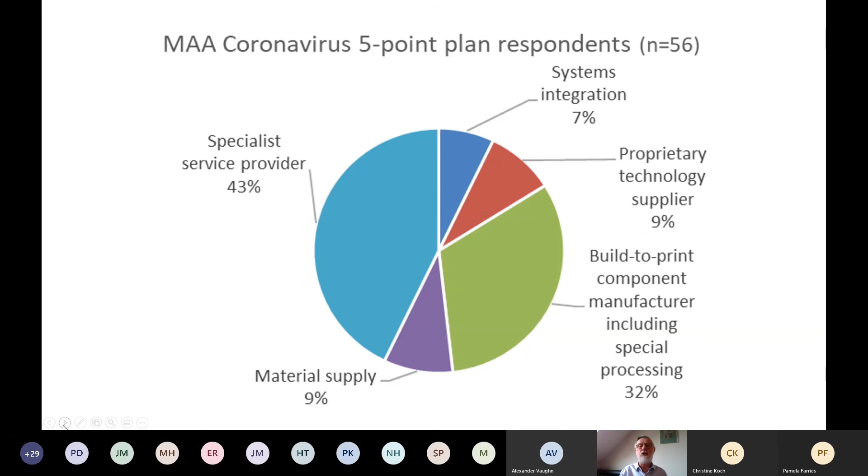We asked companies what they prioritized this year and next year. This year, innovation was a very low priority, probably because people are interpreting it in terms of formal R&D programs, or it could be they're not realizing that a lot of the changes they're making to cope with the current crisis could be seen as innovative, and therefore, from the viewpoint of the Aerospace UP program, potentially projects that could be funded.

Innovation becomes slightly more important in people's thinking next year.

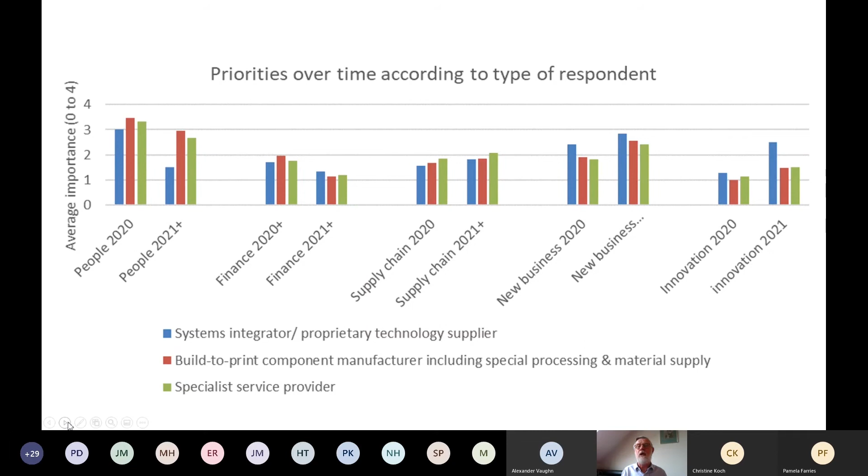When we compare the different groups, what's interesting is that none of the groups think innovation is particularly important to the current period. Perhaps they're pushing research programs to the right if they're undertaking them, and they don't see that as a priority. But next year, not surprisingly, the systems integrators and the proprietary technology suppliers boost innovation in terms of their priorities, and that's what brings it up in the average priorities of the group as a whole.

And that's comparing the two years again, this year and next year, and you can see that change in innovation becoming more important again next year.

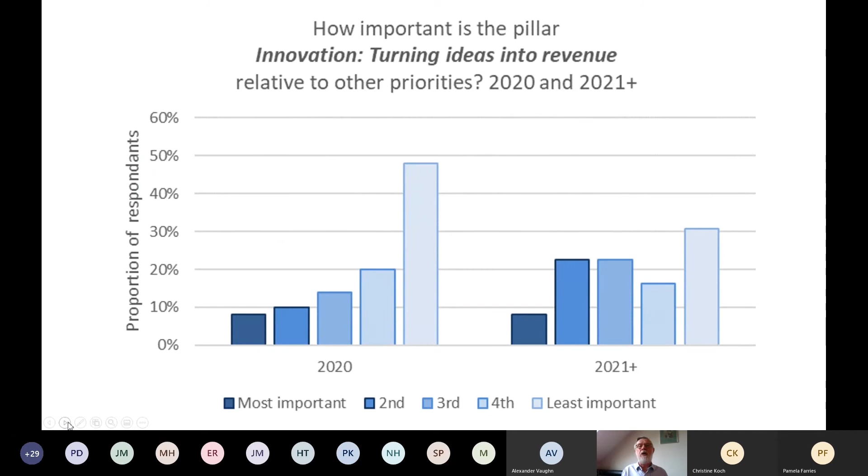If we drill down into a bit of detail, we gave companies these options to choose from, and then an open-ended question to allow companies to mention other things that mattered. So diversification is critical, the first one on this list. We looked at the rail industry yesterday, for example, and we know that a number of the kinds of projects we run, whether they're NATEP or DRAMA or aerospace sub-projects, are about diversification in the sense that they're allowing companies to enter the aerospace industry with new technology, or encouraging aerospace companies to take advantage of their capabilities in other markets as well.

Opening up innovation in general in the supply chain is seen as important, particularly the bottom-up kind of innovation that we promote in the MAA to support small companies to innovate. And of course, carrying on investing in green technology that the aviation industry has been doing for a number of years now is still important. As you can see here, all three of these priorities were marked roughly equally. There isn't a clear winner in this list.

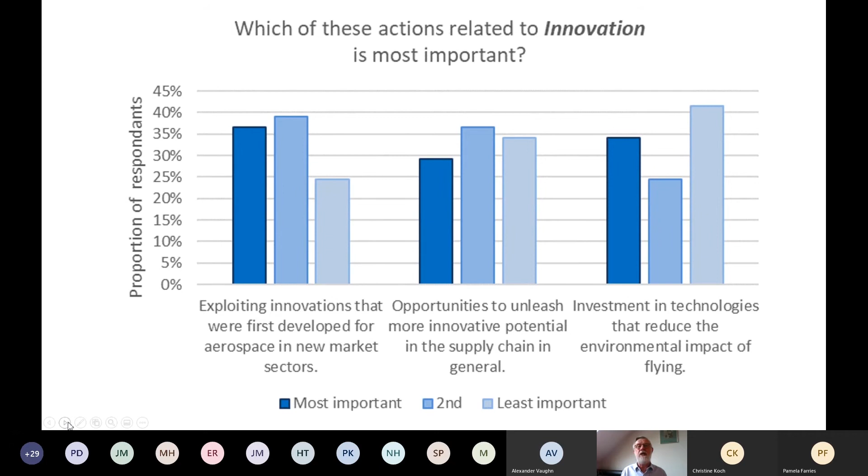So when we asked our systems integrators and build-to-print companies if they had other ideas, nothing really stands out. This is verbatim what companies answered, so nothing that we particularly missed with those three priorities came out in this question.

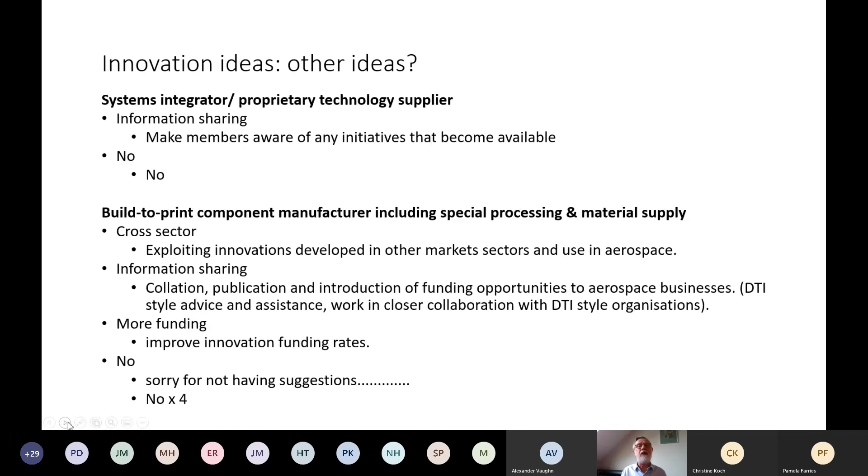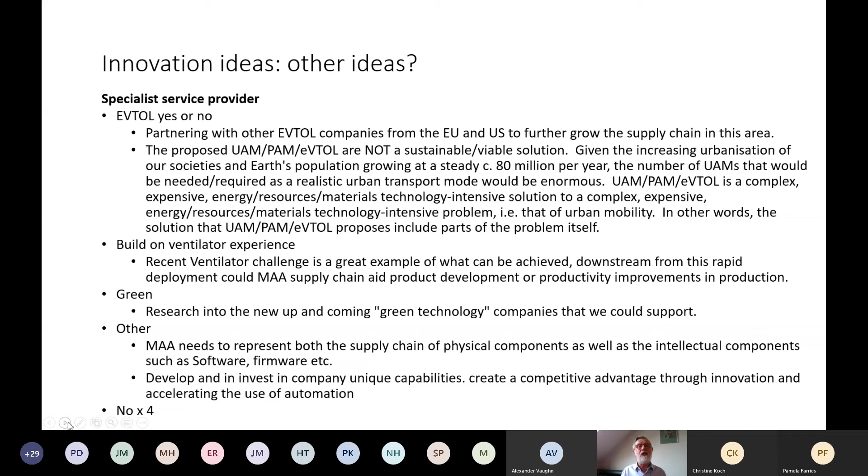When it came to specialist service providers, we did open up some veins of interest with people giving us long answers, particularly proponents and opponents of unmanned aerial vehicles had a debate, unbeknownst to themselves, in these slides, but always useful to see what people think.

So that's the quick summary of the MAA survey, giving you some ideas about what people thought about innovation.

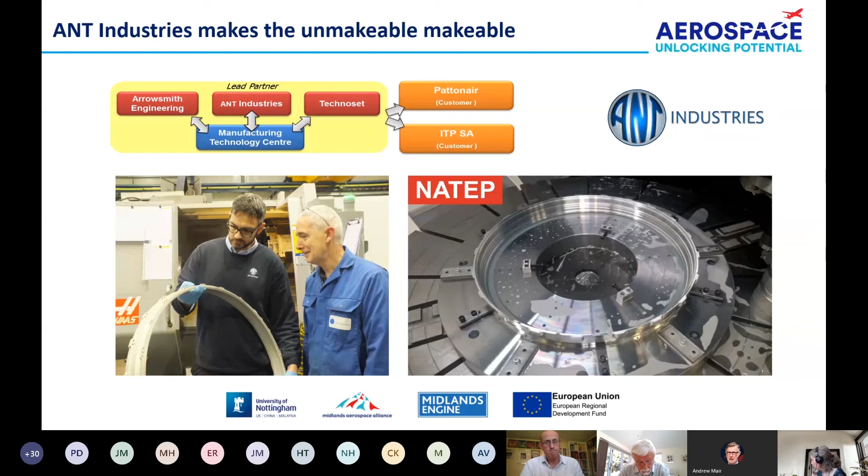And they managed to come up with much better solutions to these processes. The real point here is that this was a legacy part, and the real goal was to be a supplier on the new turboprop engine which GE were designing. Naismith were very keen to show the customer that they were more than a make-to-print company, that they could add value for the customer. Bear in mind, these processes were not originated by Naismith - they inherited them with the design of the part. So when you're thinking about Aerospace UP, think about whether you've got manufacturing process issues or persistent quality issues where the solutions seem evasive, because that could be very rich territory for Aerospace UP.

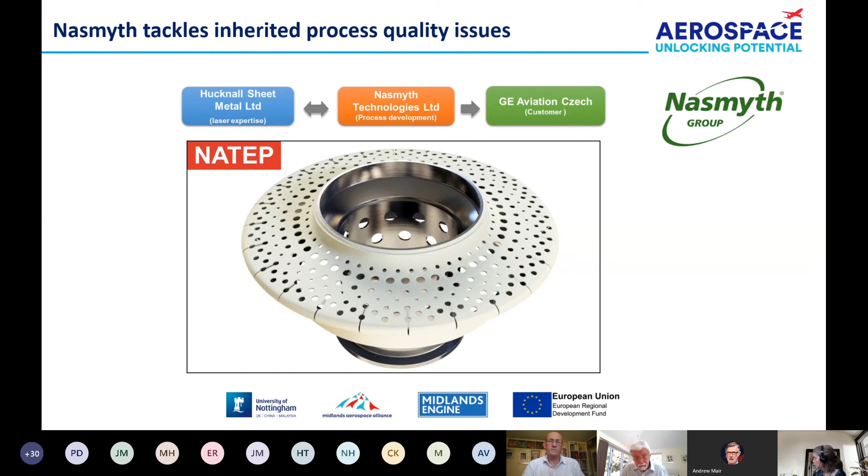So increasing the margin by lowering the cost seems fairly obvious, but particularly if you're in manufacturing where the manufacturing process is fixed, for many SMEs, without some financial assistance, this is often consigned to the too difficult or too expensive category. So Stan has an example of a company that tackled this.

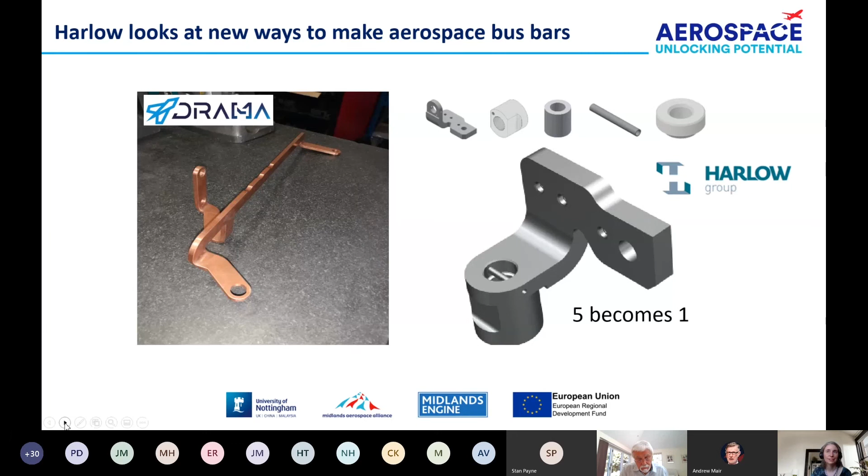Next slide, Pamela. Adding processes where there aren't any, or automating what is currently done inefficiently, can obviously bring benefits, and I want to give you a quick example of a company that did just this.

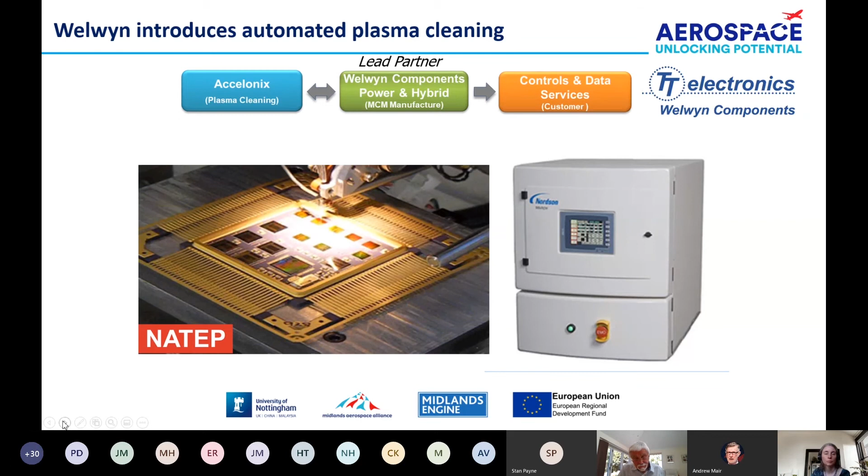So, new markets. Obviously everyone's thinking about new markets at the moment, but if you can improve what you currently manufacture and make it suitable for other markets, then obviously that's a relatively quick win. So Stan's got a good example of that.

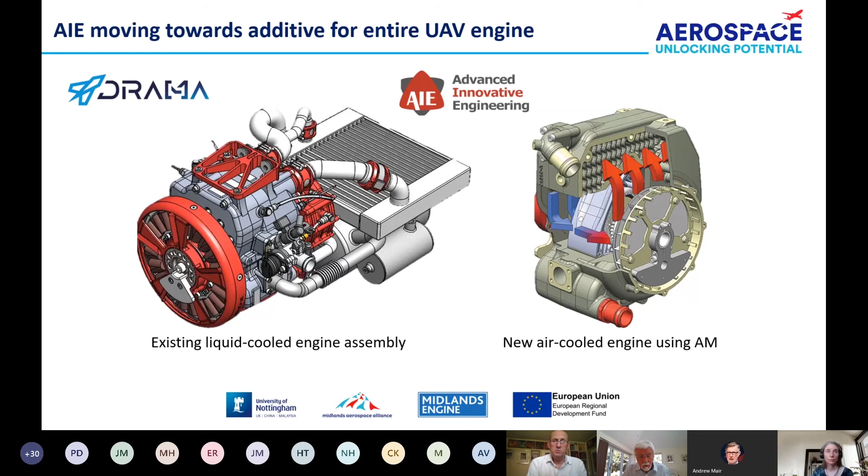It's always a good idea to look at what skills you have and see whether, if you could fine-tune these skills, you could enter other markets. One thing I'd urge everybody to do, if you haven't already, is to skills map your company and all your employees. It's amazing what some employees carry with them as baggage from previous companies, and it's a really good idea to know exactly what you're capable of and maybe didn't know.

When I was at ITP, we skill mapped the whole company, every single job, every single person. It was quite incredible the range of skills that we had that we didn't know we had. Next slide, please.

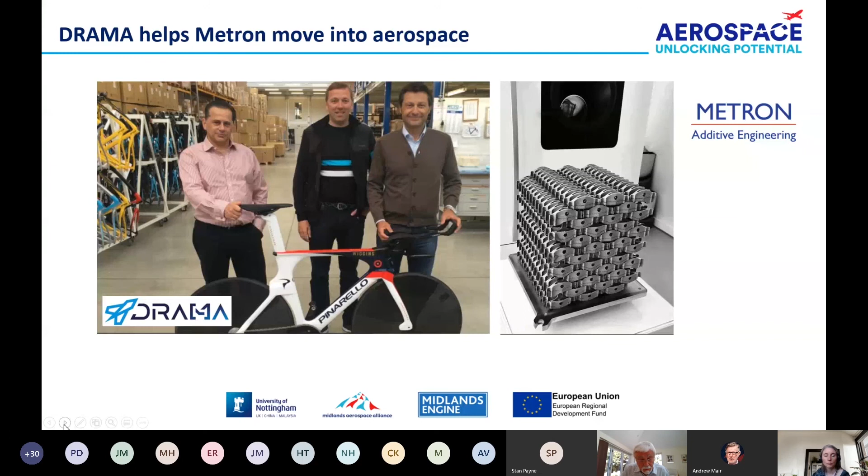Next slide, Pamela. So if you need to develop new skills, then of course that's a different situation, and Pamela's got a case study which she'll talk about that.

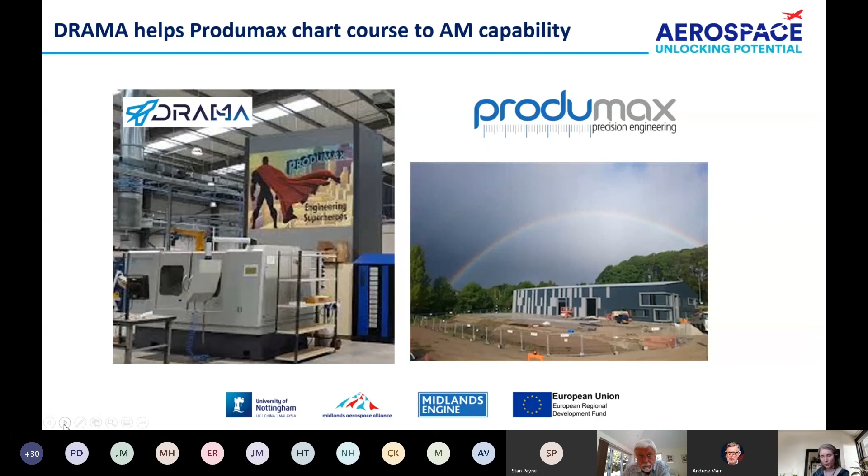So, new markets by developing new products and skills. This is the big one where you really want to go for it. Not perhaps everybody's cup of tea, but for some it has been a very lucrative thing to do.

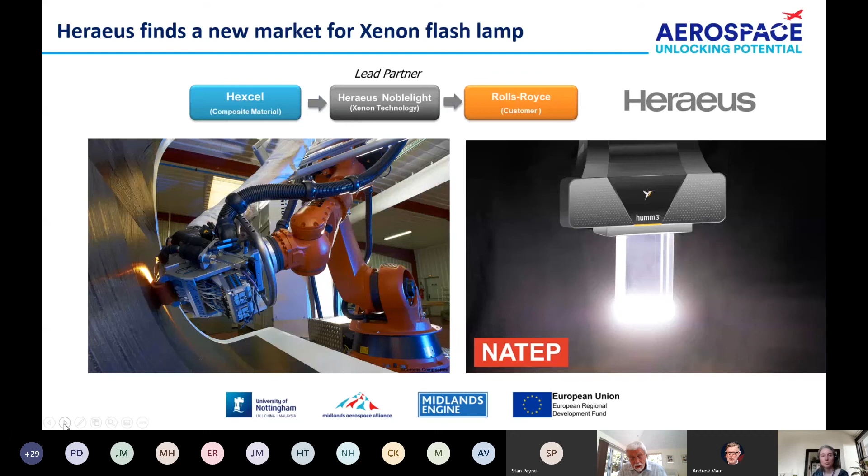Which is very important if you're laying up big composite panels. So just a great example of really examining what you do and drawing out the key things that might be marketable elsewhere. As I say, not for everybody, but for Heraeus, it was a lifesaver.

Of course, not all companies manufacture products. So what about companies that manufacture materials? Could a grant help with a new material or manufacturing process and progress it through to new markets?

This is a good example of that, a NATEP project where SHD, based in Sleaford, Lincolnshire, that makes composite pre-preg material, identified a new type of resin which could replace the traditional phenolic resins used in composites. And this resin was in fact derived from the waste products of sugar beet production.

Seems unlikely, but true. So on this project, they optimized the material, they built and tested panels made of the new pre-preg, and found that it in fact had a better surface finish, better fire resistant properties, was more environmentally friendly and better to produce for operators in terms of VOCs, and had at least equal mechanical performance.

So this was a great example of what we call in the MAA bottom-up innovation. It's an idea which would probably never have come from top down, because it needs the experts that are in these businesses to understand what's possible and then to show customers the potential.

And of course, the great thing about materials is that they're inherently cross-sector. In fact, the sector to take up this first has been the rail industry, despite being intended for aircraft interiors originally. So while aerospace gets itself sorted out, they're capitalising on another market entirely.

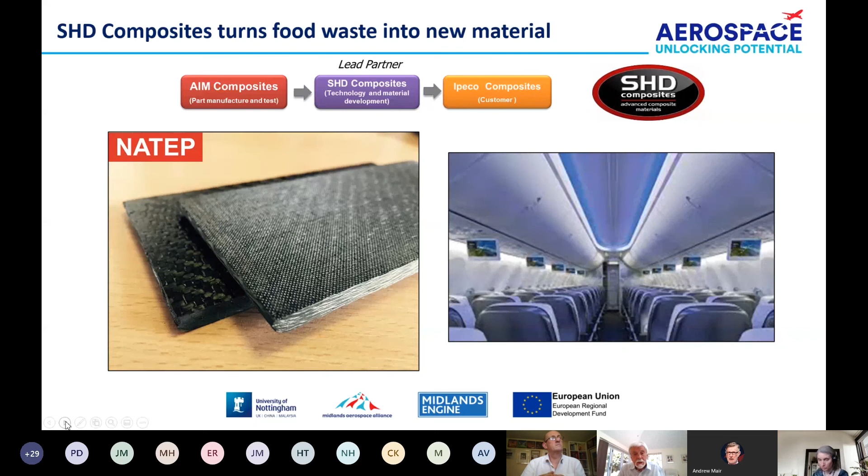So to finish this section, Stan's going to talk about a company that decided to move up the supply chain and just get a bigger slice of the available pie.

Yes, hello again, everybody. A&M EDM are a family-owned business, basically located near the centre of Birmingham, and they've been making rotary engine parts and finishing those parts for many, many years.

They realised that they built up an enormous expertise in building these components, and they decided that they would like to move up the supply chain by designing a whole engine, a whole rotary engine for UAVs themselves, and therefore move up the food chain. So when this idea really held with them, they were helped with a NATEP project to explore this idea, and so they hired a design engineer experienced in small rotary engine design, and decided to make and develop their own UAV rotary engine.

So along the way, they sought and gained the support of a UAV manufacturer and lots of other partners who understood combustion and how to run test facilities, for instance. And this detailed market knowledge led them to develop a very innovative, small but very innovative 11 kilowatt Wankel type rotary engine for UAVs. It was designed from scratch, built and tested in their very own purpose-built dynamometer and test facility inside their own premises.

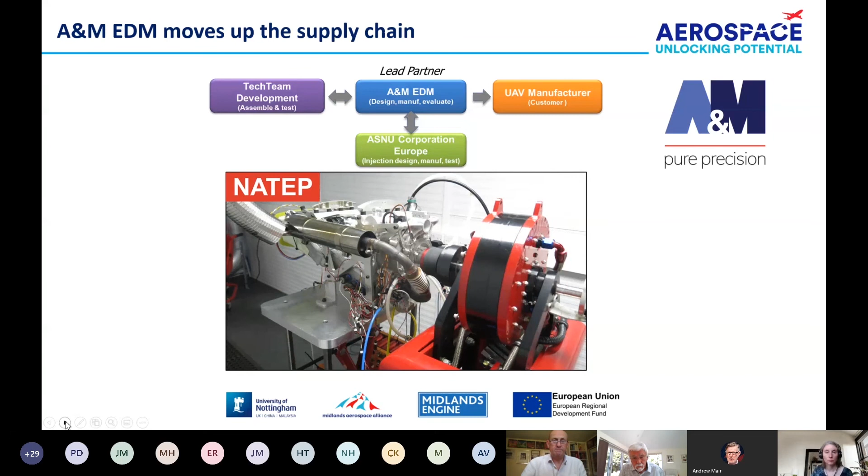Thanks, Stan. So in this last section, Pamela's going to say some words about dealing with the challenges of COVID-19. We don't have many examples of this, unfortunately. I wish we did, but we don't have a lot to draw on. But over to you, Pamela.

Yeah, so the Aerospace Unlocking Potential programme was designed and bid for well before we had any hint that COVID-19 was going to be affecting our lives, but it could still be there to help with issues that are specific to dealing with the virus. And although lockdown's easing at the moment, we're through the spring peak of COVID infections, we are likely to be living with the virus in our society at some level for quite a while.

So thinking this through, companies might even have identified some aspects of the way that they're working at the moment that have advantages. They may find that having their workforces working remotely has reduced pressure on office space. This might lead to the identification of requirements for digital systems to make that form of working become a more smooth running, normal way of working rather than the crisis management way it's been done at the moment.

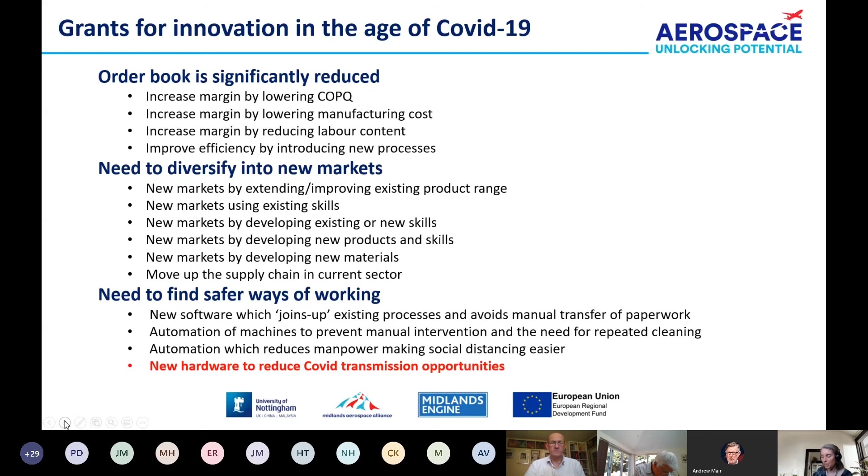a company called Acres Engineering, who are familiar to us as a manufacturer of a range of bespoke products and aids for clients in all sorts of industries, including aerospace. But that included things like stands for safe transport of valuable aero engine components, for example. And they've moved quickly to produce a range of products to allow safe working while COVID-19 is a challenge. So all sorts of screens, innovative door handles, and the sort of very practical, immediate measures that have helped people to work safely in their existing premises, with a short notice adaptation.

But all those things that I've talked about, more digital ways of working, automation and the like, might be something that your company is looking at.

Back to Andrew or Peter.

I think just to finish, we don't like to blow our own trumpets, but we are really very good. I've got about 6 years experience of spotting innovation, and Stan's got even longer. Pamela's got a long experience as well, spotting things that we think of as innovative that a lot of people think of as their day job. So do talk to us. Thank you very much, team.

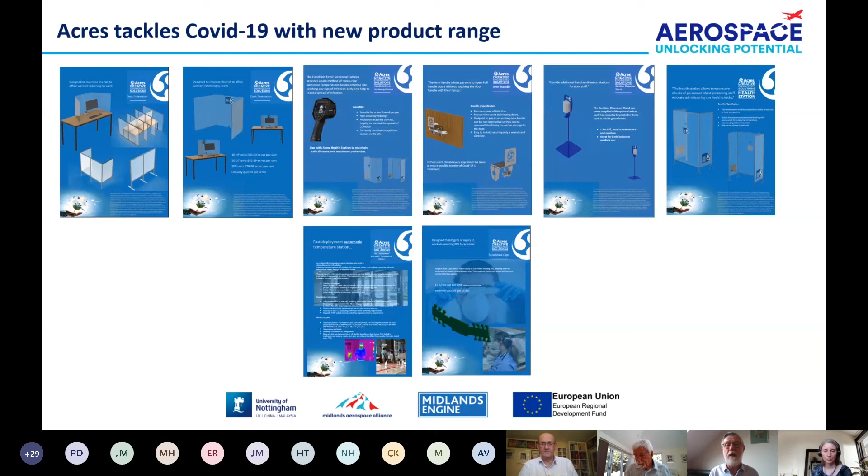Absolutely super. Lots of ideas, I'm sure, will spark thinking in those who are on the call, and just fantastic to remember all the good work we've been doing, as well as you're hinting, Peter. I'm going to hand over to Christine then to talk about the way the Aerospace UP support works, potentially to support projects like these. Yeah, thank you, Andrew, and thank you, Pamela, Peter and Stan, for your presentation just now.

We really hope that these example projects are getting you to think about what you might want to do in your enterprise. And what I will do now is to just give you a very brief overview of how the grants process is going to work in Aerospace UP. If I could have the next slide, please. Yeah, there you go. So this one breaks down what we were thinking of by setting this up.

So basically, we really wanted to be as flexible as possible for companies to participate. As I've said earlier in the introduction, you will have to be an SME located in one of the 8 Midlands LEP areas to be eligible for the funding.

The way we're looking at the process is really to make it as accessible and flexible as possible. So you basically are not looking at any deadlines for submission of projects. We will have rolling calls for you to submit your projects at any time throughout the project.

We're also not going to restrict you in regards to the grant value, except that the maximum value we can give out in one grant is £100,000. But you're really free to suggest how big or small the value should be according to the projects you have in mind. Initially, we'd ask you to produce an expression of interest where you're going to map out your project, where you should say what the value is that you would like to request.

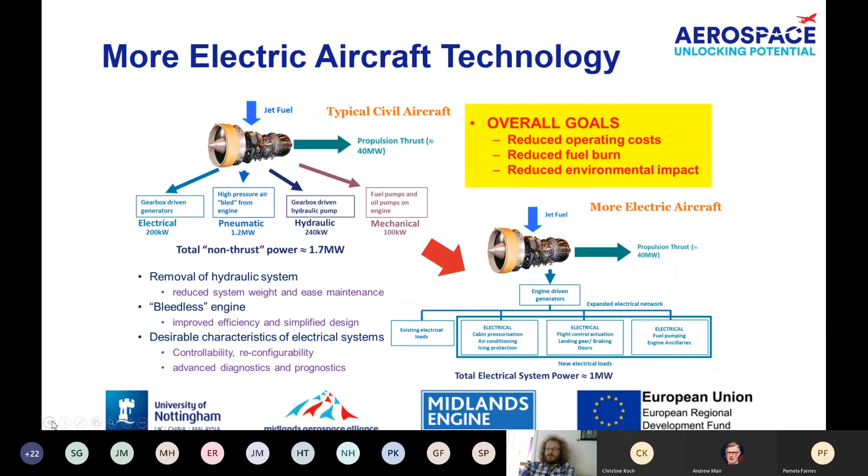And the reasons why we were looking at that - if you can have the next slide, please. No, back one slide, please. Oh, thank you. The overall goals were all about reducing fuel burn or environmental impact and reducing operating costs - things that come down to effectively the same thing. So those are the goals we had.

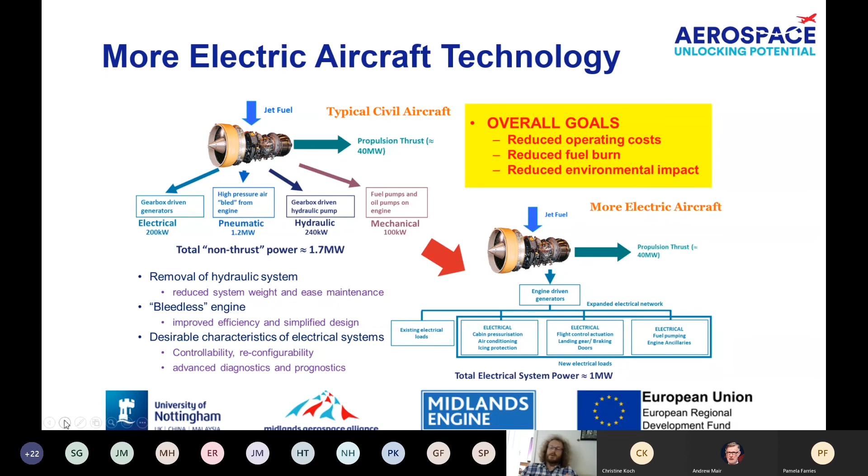The idea was if we could simplify the energy systems on the aircraft, we could electrify a lot of the functionality needed - things like actuation systems, fuel pumping systems, the ECS system, and ice protection. If we can electrify all of those things and use one source of power on the aircraft, hopefully that would enable an aircraft which is more flexible in operation, lighter and more efficient. We heard some of the impacts of this earlier in terms of what this might have on other goals such as noise. Next slide, please.

Following on from the idea of use of electrical energy is the idea of using electrical energy for propulsion of the aircraft as well. I'll look at this in more detail. There's a roadmap here from NASA - this is NASA's vision. I'll come on to the UK roadmap in a couple of minutes, which is a little bit more aggressive than the NASA vision, interestingly. We're looking here at the use of electrical energy for propulsion on aircraft and how that might span out over the next 30 or 40 years.

So what we're not looking at is flying something the size of the Airbus A380 we saw as we came into the presentations today as a pure electric propulsion aircraft in the next couple of years - that's quite a long way out. But what we are looking at is taking those steps of increasing the amount of electrical energy used in the propulsion system.

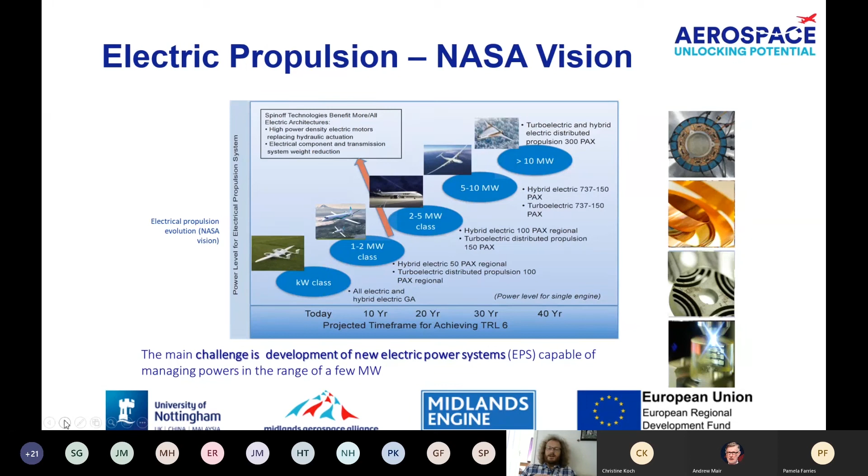There are other new entrants in the market - lots of startup companies looking at other ways of doing electric flight. The examples here are the sort of urban personal transport, the flying cars if you like, and we've all seen examples of these. So there are issues to entry to the market, but it's not just about traditional aircraft, it's also about new entrants, particularly in a city environment - if you go for an urban flying transport vehicle, the electrical energy and the cleanness and quietness that gives do have certain advantages if the other regulatory issues can be solved.

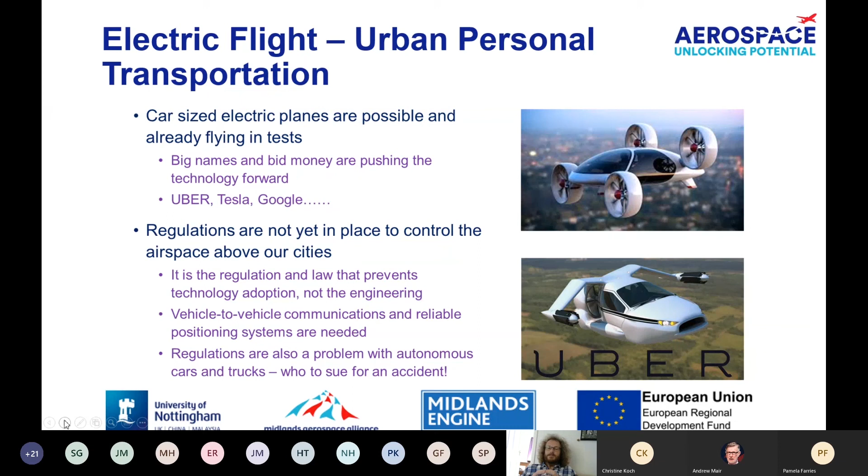If we look at trends in electric aircraft propulsion, what we're not talking about here is removing the gas turbine or turboprop and replacing it with an aircraft full of batteries charged up at the airport - that's a little further away. We need to let battery technology, electrical energy storage technology, catch up with the requirements. So what we're going to see first are far more examples of hybrid systems, where there may still be gas turbines or another source of energy on the aircraft, which we could store or use for propulsion.

The two examples here use gas turbines. The one on the left uses the gas turbines as a way of propulsion directly, but also connects those gas turbines to generators to allow distributed propulsion, maybe some boundary layer ingestion and other ideas coming out at the moment. If we have generation of electrical energy from the turbines as well as propulsion, we can distribute that and connect it with things like energy storage, maybe secondary sources of energy, to give a more flexible system. With a bit of energy storage in there, maybe batteries, we can remove some of the peak demands on the gas turbines, meaning those gas turbines can be smaller and lighter, and maybe run at the efficient point for more of the time.

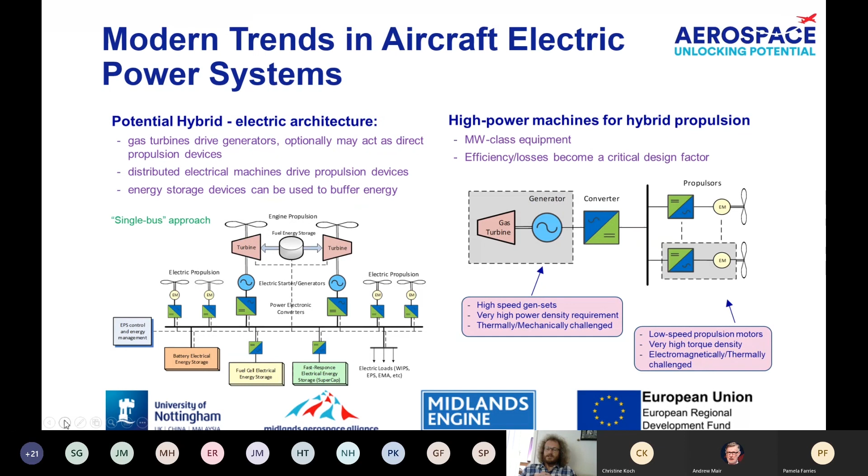Here's another example, but here we're also looking at the technologies we might need - there's an example of a power converter and an electrical motor. The thing to remember about both is we require the housing, we require the cooling. Power electronics and electrical machines are quite efficient, with efficiencies in the high 90s, but they do generate loss, and in quite a small package. So we need housings, thermal elements, oil coolant flow or air coolant flow - the power converter there is actually air cooled, and the motor is oil cooled. We need all those components talked about in the previous presentations to enable electric flight to actually happen.

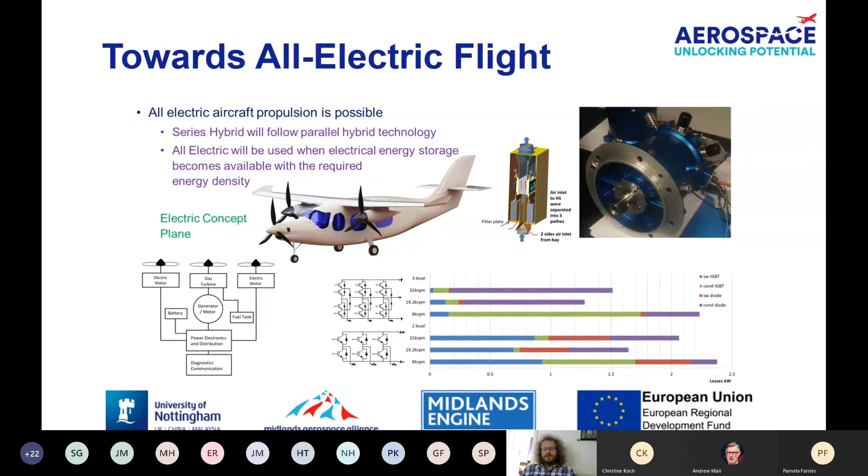So when we're looking at what technology bricks are enabling this electrification, just to give you an idea of scale - the motor on the bottom right hand side there is a 4 megawatt motor we've been building in our labs, and it's about the same size as a 30 kilowatt industrial machine. It is not a big piece of equipment, yet it's going to create a lot of thrust power.

The technologies allowing us to do that tend to be manufacturing, materials, and thermal technologies. On the picture on the left, we're integrating those technologies together, from low loss materials, intensive cooling and thermal materials, to advanced machine design. There's a lot happening around windings - how to form them from copper, how to manufacture them - bringing those low loss materials together into the rotor design, and of course the power electronics that go with that.

If you can advance one more, please.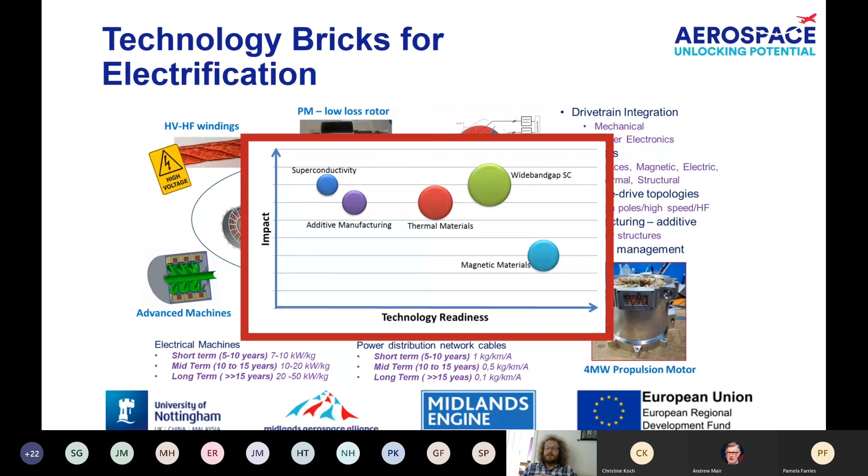That's showing the 4 megawatt machine and the power electronic converter associated with it. You've got to remember that power converter and electrical machine are processing 4 megawatts of electrical energy at efficiencies in the high 90s, but therefore we do have a lot of thermal problems getting the heat from where it's generated out of the machine and out of the power converter.

Just two examples that tie in nicely with what we were looking at before. This is focusing on the windings of the electrical machine, how we need to form those windings - examples on the right-hand side show how the copper of the winding is bent and formed to allow it to be inserted into the machine, maybe through an automated process. On the left-hand side, we're looking at advantages we can get using laser welding technologies for joining and processing, enabling us to shrink down the size of the end windings to make the machine shorter, saving space and weight.

One of the things we find in aerospace is that these technologies become very, very important in getting the sizes and weights of the machines down, enabling us to look quite seriously at these future applications in electric propulsion, as well as improving the ideas we have around the more electric aircraft.

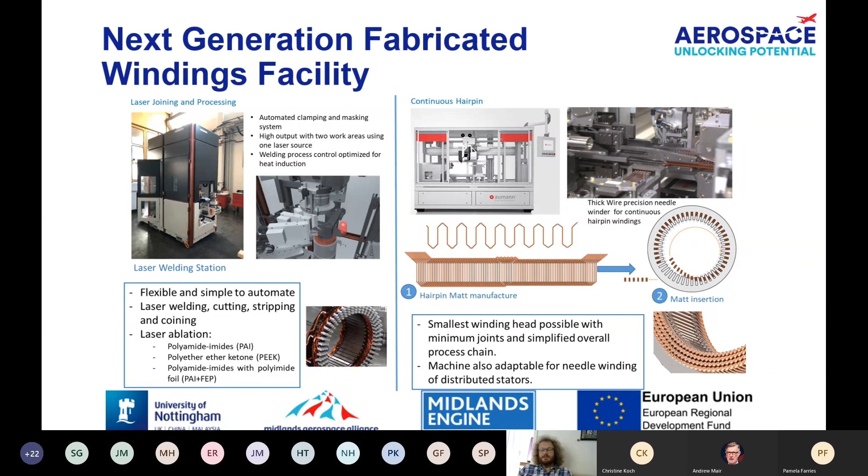So next slide, please.

The other thing we're finding with the windings as we're going up in frequency - this is a result of the power electronics - is the design of the windings, how they're formed, how they're wound, and where each small wire within a bundle of wires is located. All these things become very important, and the impregnation, the crimping, how we put that bundle of wires into the slots of the machine, and the manufacturing of that, are all becoming very, very important to us in enabling the vision for the more and all electric aircraft to become reality.

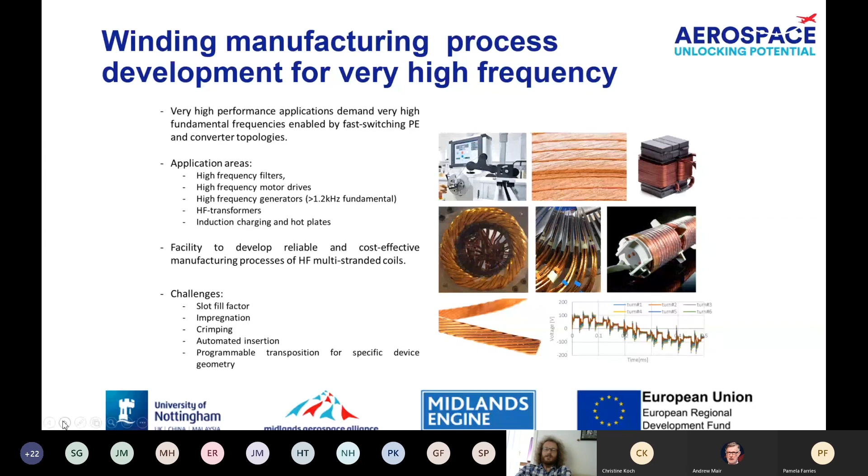And if you can imagine shrinking down the gas turbines on an aircraft, maybe moving them to a different location, replacing that with electrical energy, there's a lot of things going to go on to enable that to happen, and a lot of different technologies that need to be ready to do that. One of the trends we're seeing is that build-up of the readiness of the supply industry to be able to manufacture these parts as the more electric aircraft becomes more prevalent, and in the future the all electric aircraft becomes more dominant. So if we look at the next slide...

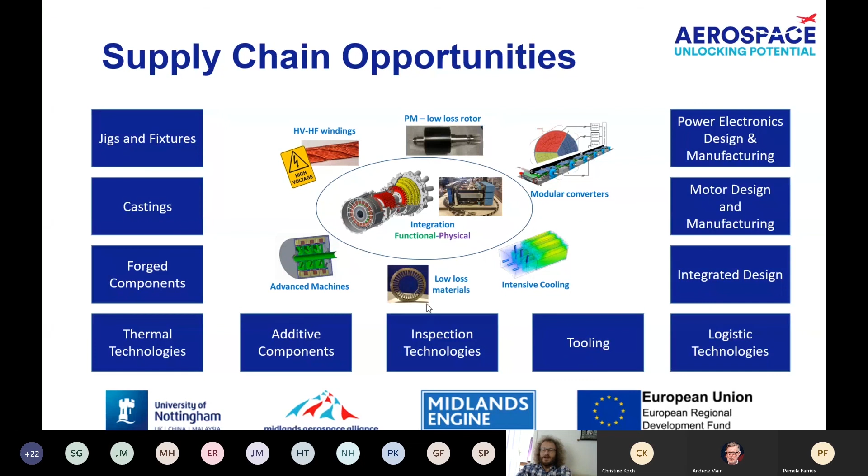Hi, Hitendra Hirani, EU Program Manager at the Institute for Aerospace Technology.

Thank you, Pat, for the technical introduction and for showing the kind of technologies that can be developed within Aerospace UP. I think the next part of the presentation is really looking at, okay, say we get the Aerospace UP projects going, say we start working with you guys on some of these technologies, we'll be developing a number of opportunities that come down the line.

And Aerospace UP is a way of getting yourselves ready and looking then also at providing some of that technology and providing some of that experience that will also unlock the door to other modes of funding and other opportunities that are out there. So I was going to spend the next few slides giving you an introduction to some of the funding opportunities. So if we go to the next slide, you'll see that.

And so that's the kind of funding opportunities that are out there. We will be sharing this presentation with you afterwards. All of those bits on the slide that are highlighted in blue are actually links, so you can click on them, you can go through, find out more information about the calls. At this moment, we've only got time for doing a quick introduction, but I think what you get from this is that there is a really rich ecosystem that's out there and a really big community that's forming around addressing the challenges that Pat was talking about.

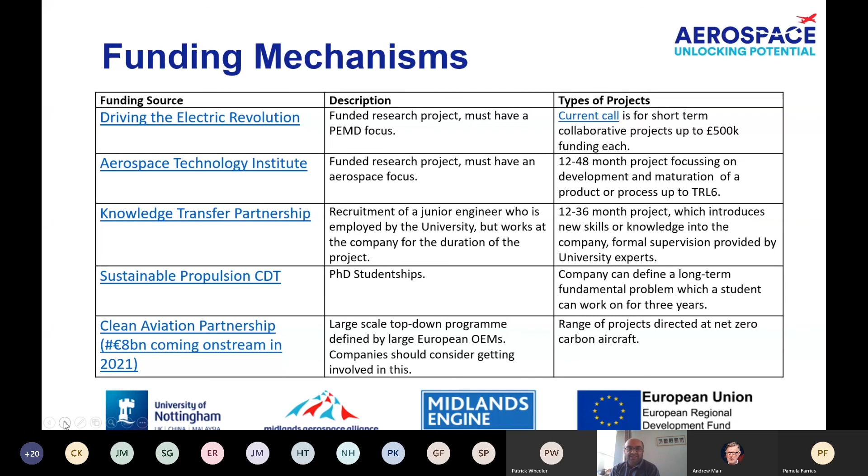Whilst these programs may look like a long way away, and may be a little bit intimidating because there are so many partners and companies involved, one of the things we have been able to do is bring SMEs into these kinds of programs. The next slide is a really good example of that.

This is a project we are currently delivering with a company called NEMA, based just outside Manchester, and another SME called Power System Technology. NEMA is a real example for us because it's a company that actually started out making springs.

20 or 25 years ago they were making springs exclusively, and now they've expanded what they do. They've taken everything they learned about bending wires to make springs, bending bits of metal, into asking: can we make them better, at lower cost? Can we get more value out of these bending processes and the understanding we've developed on metals?

They've been developing those skills and their manufacturing processes, and where they've ended up is they've now started making motors, because the skills you need to bend a piece of wire to make a spring are exactly the same kind of skills you need to manufacture a motor.

So this project, if we go to the next slide now, has two aspects to it. NEMA are doing the electric motor development and manufacturing for this particular part. Another company, also an SME, in this case not based in the UK, is doing the power electronics development and manufacturing. We're helping both of these companies with technology development.

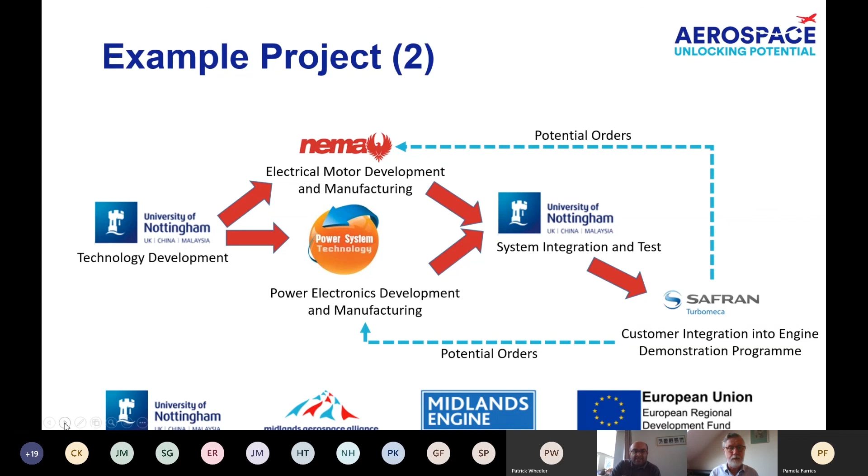If we move to the next slide, I'd like to invite you all for any further questions. I think we've had a few.

Hitendra, thanks very much, and to you, Pat, as well, for giving that great overview of electrification in aerospace, and Hitendra for making clear how we can help people find their way through possible funding channels, not just Aerospace UP, but beyond it. That's really important, because we've all got a strategic objective, the University and the Midlands Aerospace Alliance, in joining up our aerospace cluster with our major aerospace university in the Midlands, if not the UK, and making the most of the connections using Aerospace UP itself.